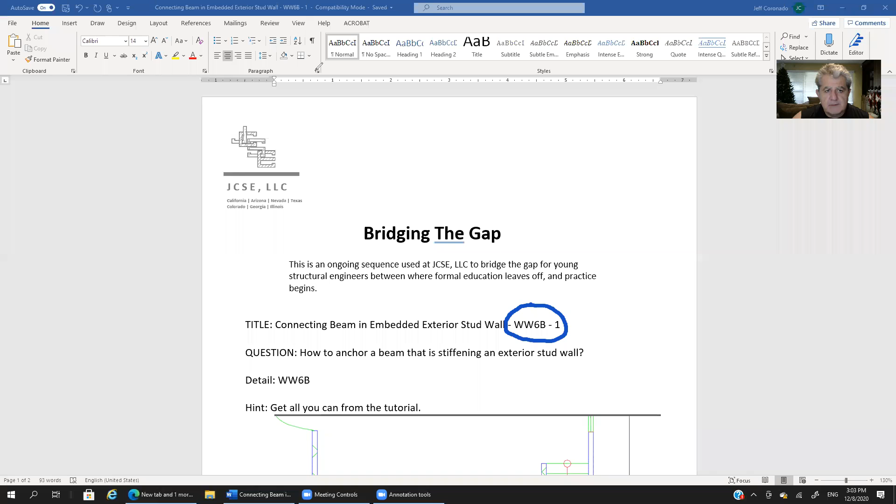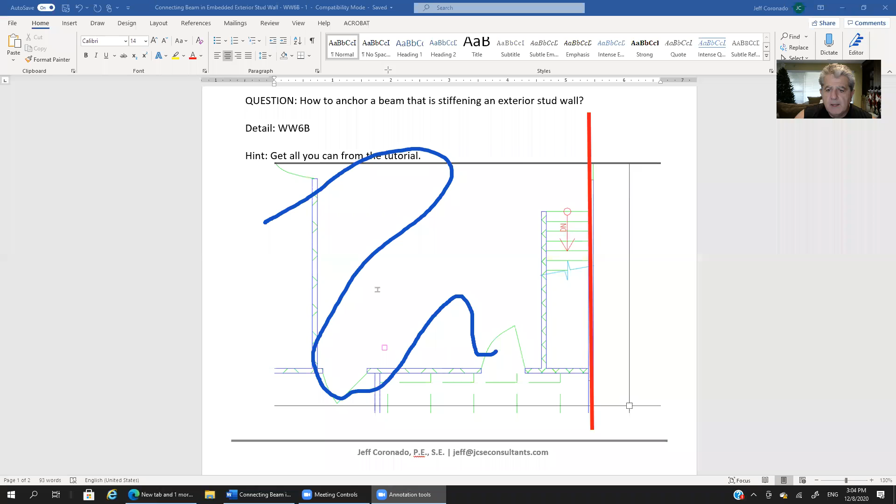So let's get into a plan view here. Clear the screen. Here we have a floor plan. It's a type 5 structure, can be 2 stories or more. What we have here is floor area - all of this is floor. We would have an exterior wall across here, and then we have an opening in the floor, in the diaphragm, right here.

Very frequently we would have a stairwell here - could also be an elevator or some other opening that occurs in the floor right adjacent to the exterior wall. The problem with that opening is that it introduces a weakness in the wall, making it unstable. We're not going to get too much into that because that's a matter for another tutorial. If you have a question on that or anything else I say here, feel free to leave us a note at the end and we'll try to point you in the right direction. There's likely other tutorials in the library that cover these other issues you may be wondering about.

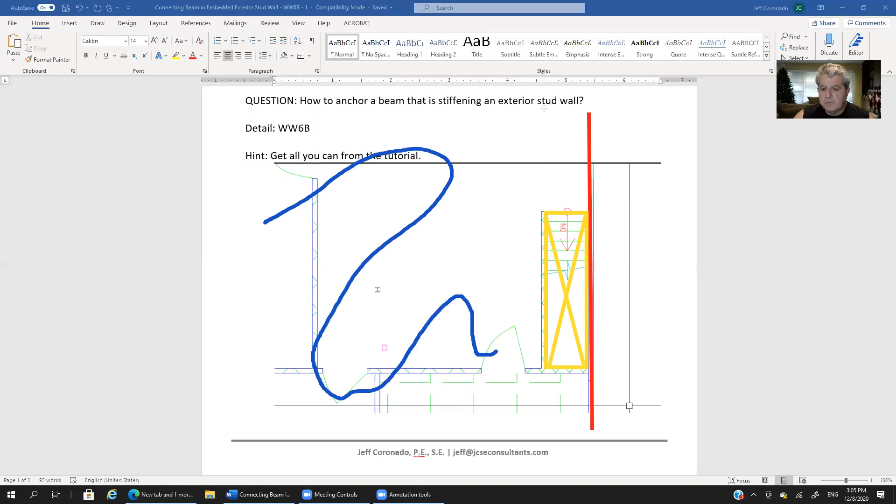Let me clear the screen here. The important thing for now is to understand that because of that weakness the stair introduces, we will likely introduce a beam in the wall, embedded in the wall, that bridges the gap for that opening. The problem we have here is that we are going to have a wind force - what we call a component and cladding wind force, which acts out of plane of the wall, and that's covered in other tutorial sessions. But we have wind pressure that exerts a suction force on the wall, wanting to pull the wall out. So we introduce this beam, shown here in red, to strengthen and stiffen the wall across the diaphragm opening.

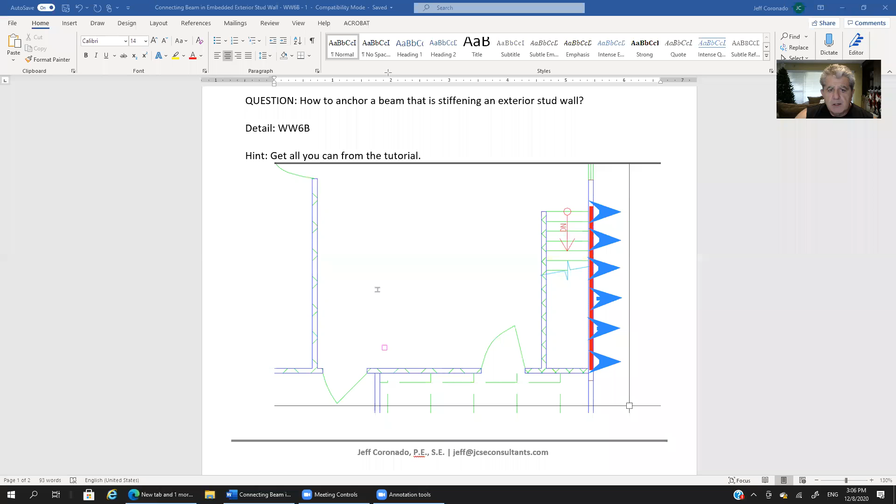Now also remember that we do have floor framing. Let's assume we've got floor joists running in this direction, so I'm going to illustrate a couple of the floor joists as they run left to right. So there's our floor joist. We've got the beam in red that's intended to resist the out of plane force in the wall.

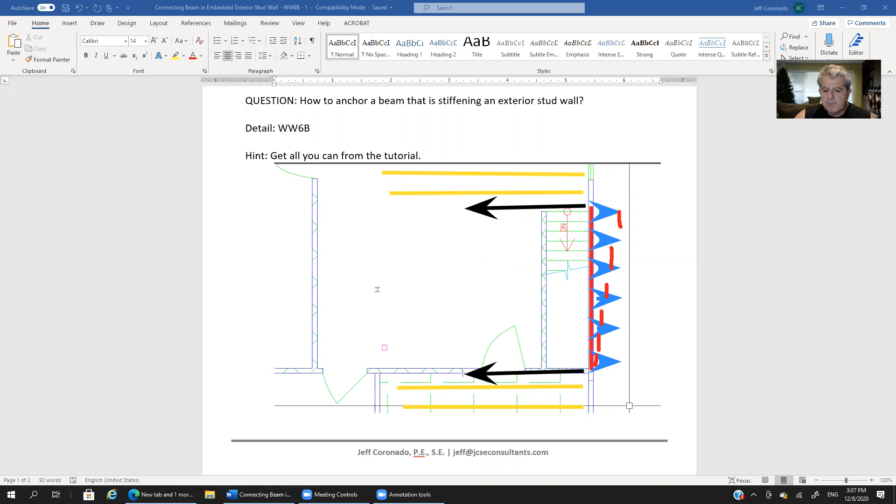Now the problem is, now that we've got this beam that bridges the gap in the diaphragm, how do we anchor the beam so that it doesn't blow out? What keeps this beam from just kind of floating out here and blowing out? Well, what keeps it from blowing out is we need to provide an anchoring force that pulls the beam at each end back into the diaphragm. So how do we do that?

Well, the way we're going to do that is by providing first a strong element, let's say a beam, at each end of the opening. Now remember, that opening in the diaphragm was right here. So at each end, top and bottom of that opening, we're going to provide a strong element that not only helps support the stairs, but also pulls back the beam shown in red to keep it from blowing out. That's the purpose there.

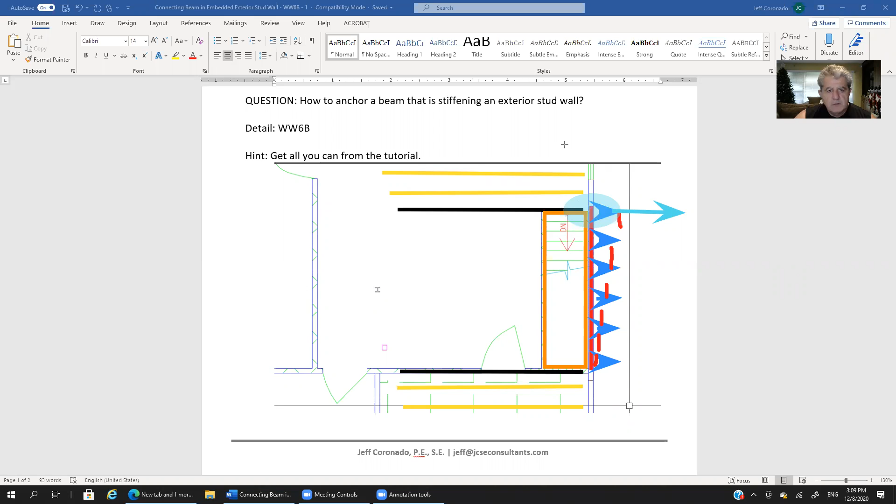Now, the trick here is what we need to focus on is how do we anchor that beam so that it doesn't blow out? What keeps that beam, what keeps the end of that beam from blowing out? So what we've got shown here is that connection that keeps the beam from blowing out. That's what we want to focus on now. So let me clear this screen and move on.

Okay, and this is what that's going to look like. So the beam that we had in red, the one that's embedded in the wall, is this one here.

That's this beam. So our forces, our wind pressure is acting in this direction. Our wind is trying to create a suction force on the wall, causing the beam to pull out and away from the structure.

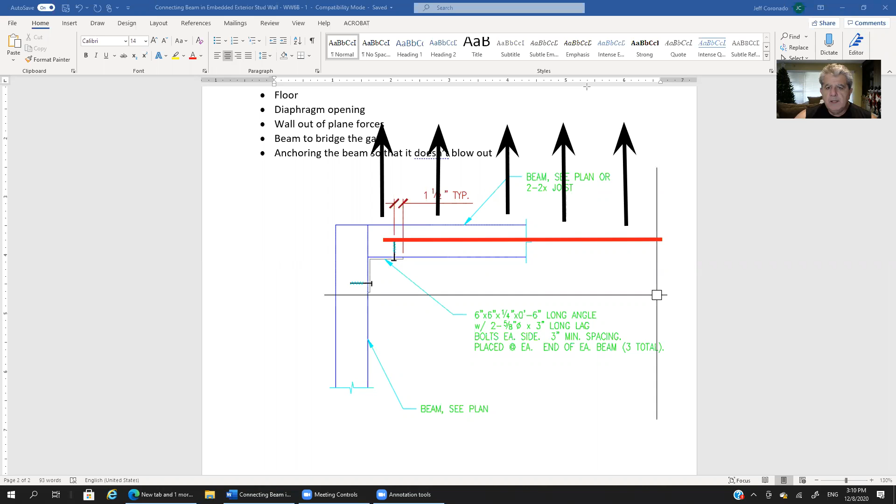So what we need to do is to provide a force, a transfer at each end of that beam that pulls the beam back into the structure.

This is the element that's parallel to the framing of the floor, right? This is where we had additional floor joists. Now we're looking at them going from top to bottom, right? And then the exterior wall, remember, the exterior wall just kind of continues across here.

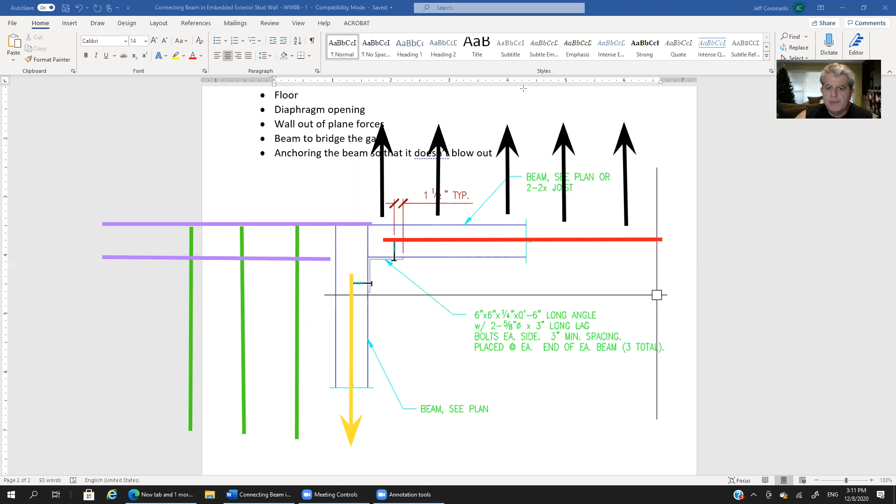But with that in mind, now let's clear the screen and let's look at this connection. So again, we've got a force here that's pulling this beam away, right? That's the load that we need to transfer.

So how do we get the force? How do we get this force in the beam that's parallel to the wall into the beam that's perpendicular to it? That's what we got to do here.

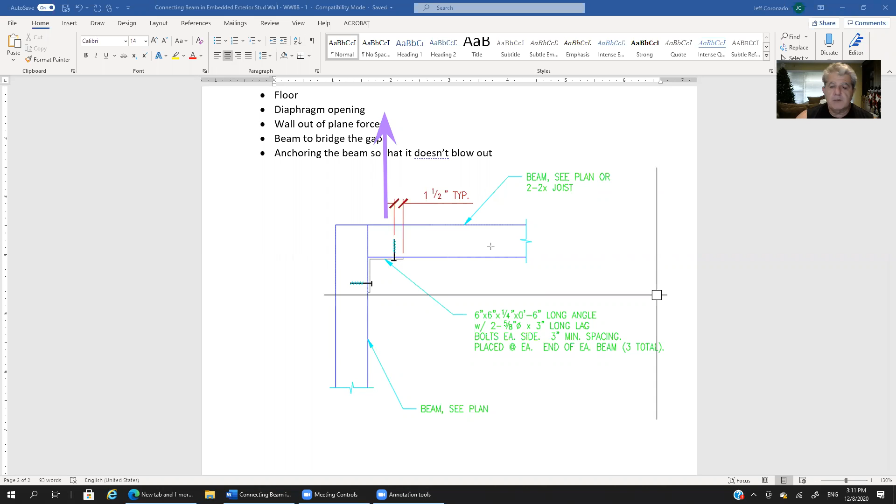So we need to visualize our load path, right? After all, that's primarily what we're doing here in structural engineering, is making sure that we can follow our load paths and that we can provide adequate resistance each step of the way to ensure that the loads are accounted for. So we've got this force that's pulling the beam out of the structure.

How do we get it into, well, it looks like first we need to go into this lag bolt. So how do we get it into the lag bolt? So this here's a lag bolt. If you have a question on that, I'll point you to another tutorial where we cover connectors, but that's our lag bolt.

We need to then get this force into this lag bolt. So you need to visualize how this is going to fail.

Well, it looks to me like if this were to fail, it would be the lag bolt staying here, if you will, staying put, and the beam would slide out and end up a little bit higher, right? It'll blow out, kind of what I'm showing you with this blue rectangle, right? It will pull away, in essence it will pull away from that lag bolt.

So that should be a clue, right? What are we designing this lag bolt for? We're designing it for withdrawal. Okay, so we've got a lag bolt under withdrawal loading.

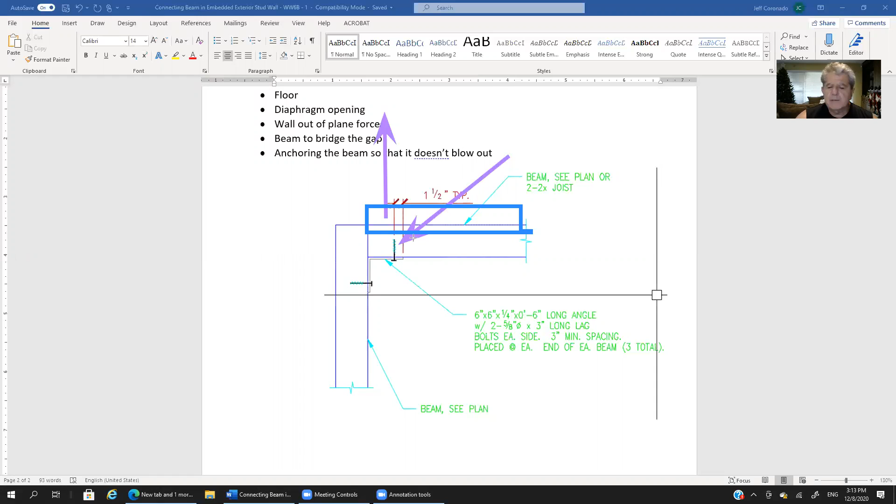So for that, we would have to, I don't want to get too much into that. That's a matter for another tutorial. But we would need to take into account the lag diameter. We would also need to take into account the embedment of this lag bolt, right? This distance here, the diameter of the lag bolt, and that will dictate then how much withdrawal capacity we have.

So with that, we got the load into our lag bolt. Okay, then what's next? Oh, by the way, for whatever it's worth, we do have a value here.

Whether it's correct or not, well, that you need to check for your conditions, right? You can see here we have a 5/8 inch bolt that is 3 inches long. Actually, two 5/8 inch bolts that are 3 inches long to resist that load. Maybe that's enough, maybe it isn't. Maybe you can do with less than that, maybe you need more than that. That's for you to check.

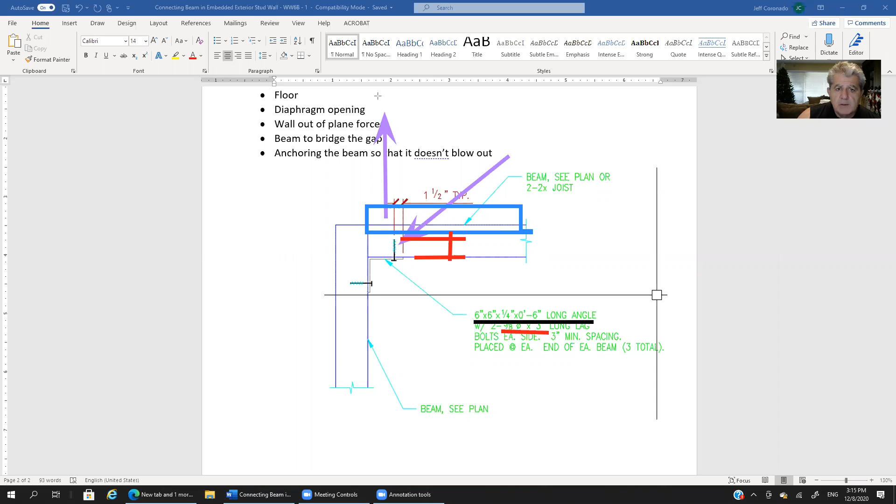So that's a 6x6 by 1/4 inch by 6 inch long angle. So what do all those numbers mean? Well, the first 6 refers to one of the legs, that's this dimension. The second 6 refers to the other leg, that would be this dimension here.

The 1/4 is the thickness, and the 6 inches, the last 6 inches, this here, refers to the direction in and out of the plane. So in this case, it's in and out of the plane. In the structure itself, it's the vertical direction, right? That's the length of this angle section in the vertical direction.

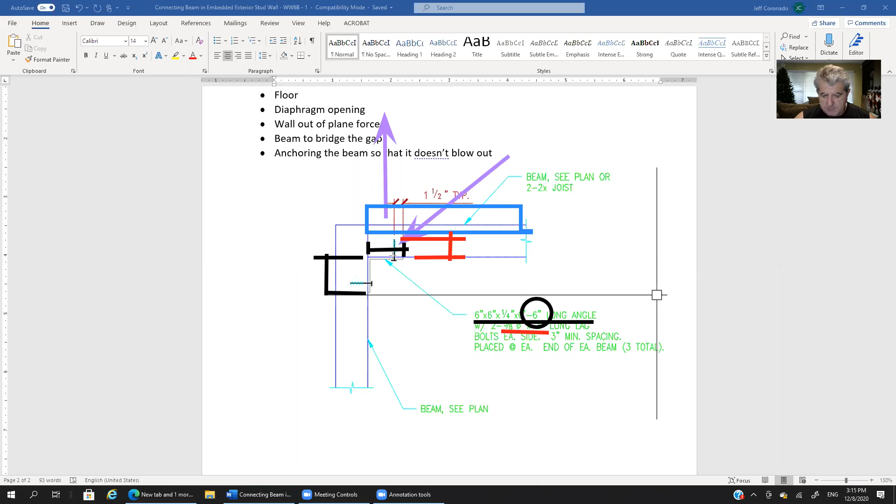On this particular detail, since this is a plan view, it's the dimension of the angle that goes in and out of the plane. So we've got a 6x6 by 1/4 by 6 inch long angle.

All right, how do we know that that's adequate? How do we check this member for the forces we have to make sure it can resist the forces induced on it? Well, here's how I would do this.

Let me blow up our angle off to the side here. This is kind of an exaggerated view of it. There's our angle. I'm going to show the lag bolt in red.

And remember, that lag bolt has a force that's pulling up. As we're showing this in this sketch, it pulls up on the angle. So what the angle is going to want to do, and this is again where the artsy part of structural engineering comes in, it's this ability to visualize deformation and visualize failure modes that becomes so essential to what we do.

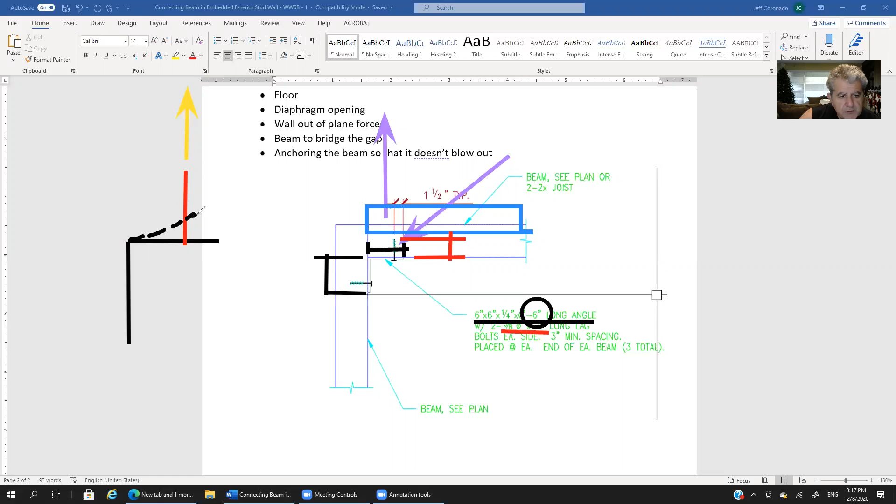So the way I would visualize this failing is by this leg, by this angle being so weak that it would just pull up like this. It probably would straighten out here, or actually would just be straight. It would kind of be curving here, and then be straight over here.

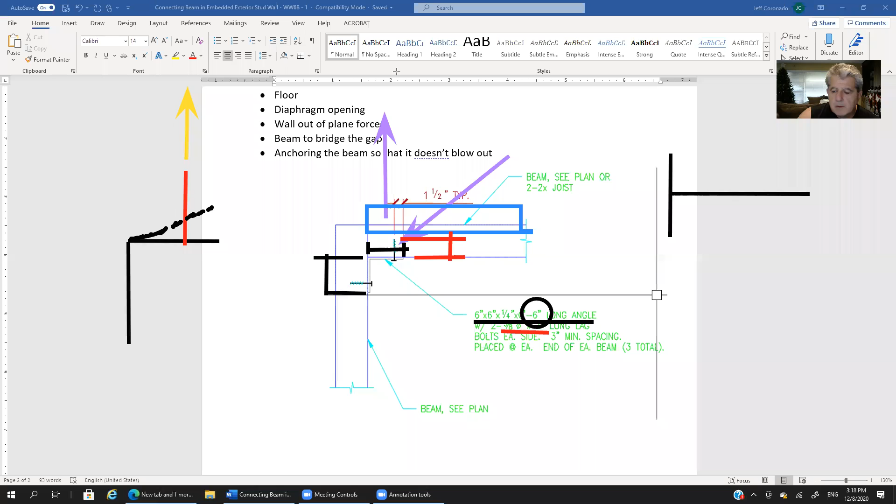Because what do I have there? Let me redraw that in a way that's a little bit friendlier maybe to how we would see it in school.

So does this ring a bell? This is kind of how we saw it in school. We have a cantilever beam fixed on one end, free on the other, with one concentrated load on it. This is what we learned in school. Well, this in red is real world for what we learned in school looked like this. So what we've got is a cantilever beam with a concentrated force.

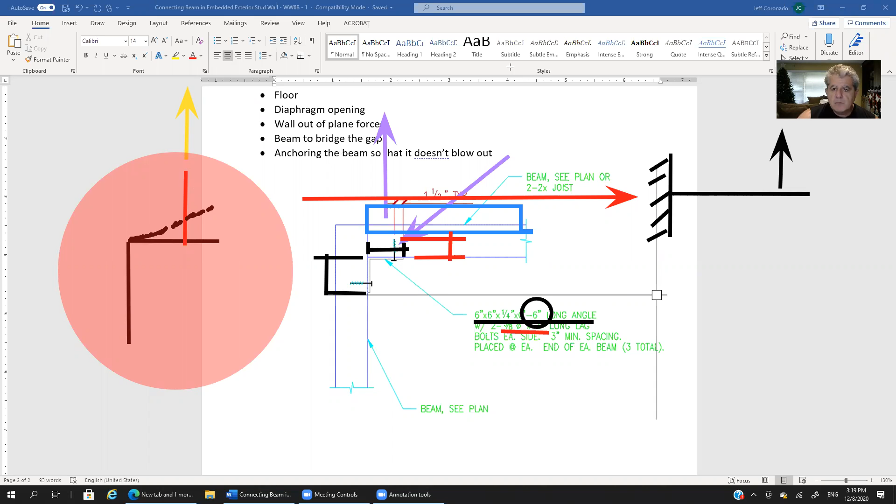So what's our lever arm? Well, let's see. So here's our distance, and therefore here's our lever arm. I'm going to say that the cantilever beam is fixed at the other leg. It cantilevers out to the concentrated force. That's the distance, and that's what creates the moment then.

Therefore, I have a moment. So I have a moment here that's counterclockwise, acting on this leg that in this illustration is horizontal, it's the horizontal leg. And that gives me the moment on that leg.

So in essence, what I would be checking for here is a weak axis bending of that steel plate. If you need help with that, let us know at the end of this tutorial and we'll point you in the right direction. But what you've got is weak axis bending on that plate, which I've modeled as a cantilever beam, to see if it's adequate to resist the force that the lag bolt induces on it.

Okay, with that then, let me go to brown here. Once I do that, how do I draw this? I now have an axial load, if you will, going into this leg of the angle. This member is now in an axial load.